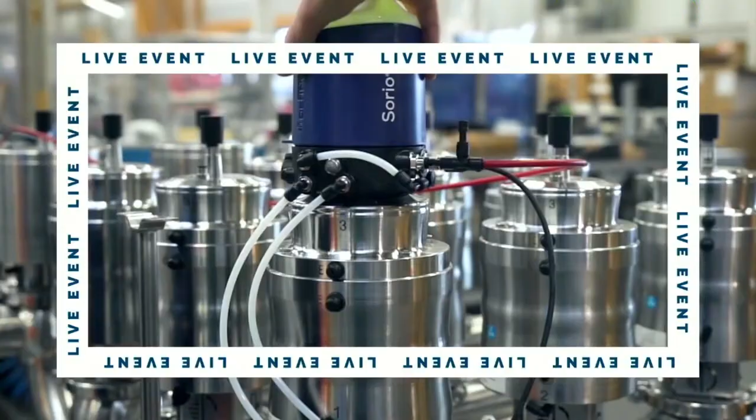First off, let's welcome the Managing Director of Definox, Magali Chouinteriau. Hello, Magali. Good morning, Jean. Good morning. How are you? Fine. Quite nervous, but fine. Magali, tell me, what's happened at Definox all this year? All this year, that represents many days for action. Take your time. We can go.

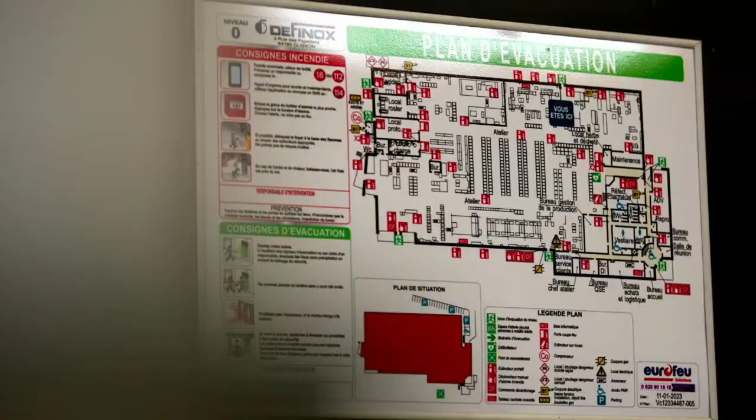So, new people, new product, new customer, new business, less carbon emission, and the most important, less injuries. This year, you've decided to focus this event on safety. Could you tell us why? You know, as we can see on the screen, at Definox, safety is a basic, as in many organizations, of course. And we spend a lot of time, a lot of energy, money, trying to change our mindset, our behavior, and we know that it's a daily challenge. And we consider it's the same for all organizations and it could be your challenge too. That's why we decided to focus on it.

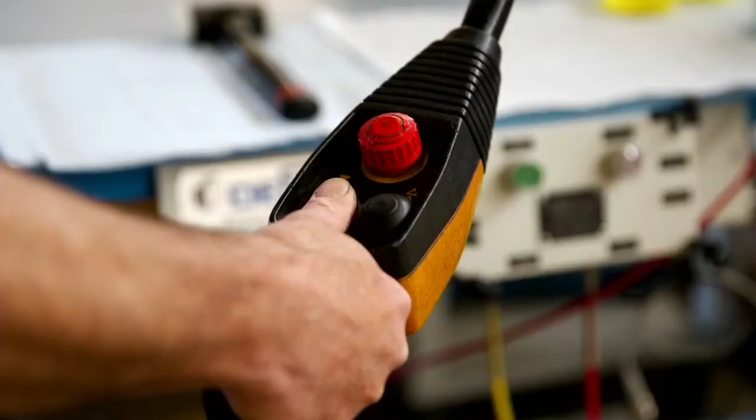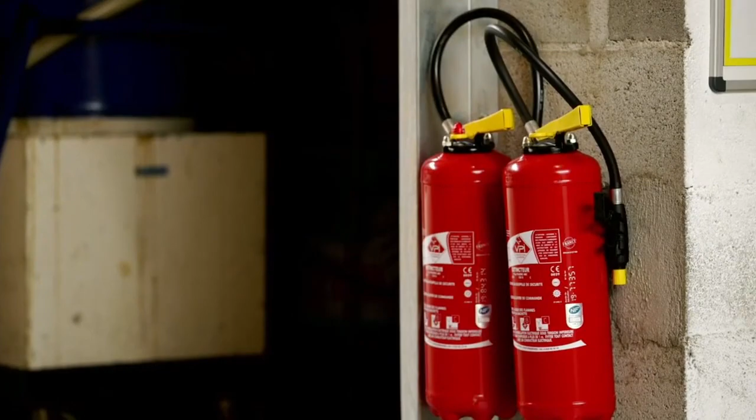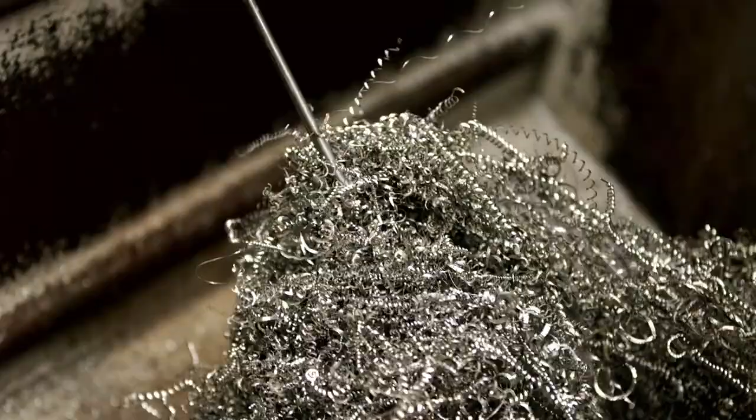Safety is a vast subject. Who does it concern? People who are moving, who are acting, interacting, who are working. But it's not only a concern of people, it could be a question of product too, how we can protect the product. So that can concern many, many people. Everyone. Safety and economic performance. How can you join the two? How can safety boost your performance? That's a good question. Thank you.

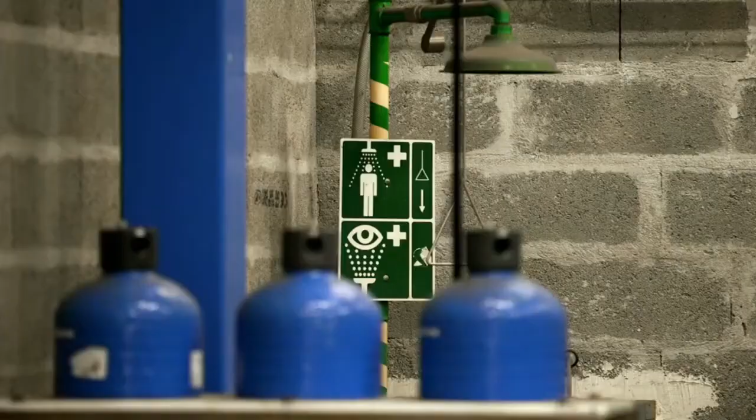Yeah, safety could be an issue, a problem, a question that needs to be faced after injuries. We are quite afraid and we need to react. It could be more a negative reaction, or it could be an opportunity to change, to improve the situation and to perform. That's where we want to be today. To act before, with more proactive action. Okay, have you got any example? Yeah, it could be just today. We would like to humbly share experience for maintenance people with quick wins, with tools, with behavior, or to share expertise to show what could be the right equipment for the right product and the right process.

Great. Magali, let's start with the first part of the show, and we'll meet at the end of it. The first part of the show, the safety provided by Definox. Welcome, Nicolas. Hello, Jean-Hugues. It's a pleasure to see you again. Nice to see you again too. Hello, everybody. I can see new faces.

So tell me, Nicolas, how does Definox respond to their customers' safety concerns? Yes, so Definox provides valves and solutions in sanitary processes, so it's mainly hygienic or aseptic valves. So I would say that for us, providing safety to our customers' solutions or to operators is an everyday challenge. It can go from finding the good or the perfect sealing technology in respect of the product. It can go also from answering a local regulation regarding a food contact product, or avoiding any risk of contamination, or just providing the customer full safety during a maintenance operation.

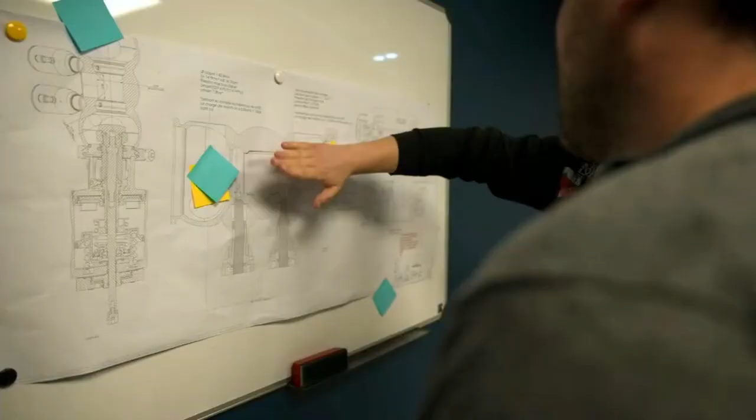Well, issues of safety and certification come into play from the very beginning, from the beginning of the valve design. Let's meet Maxime Parot, product engineer. He will explain to us how. At the beginning of the process, we have to check the different possible inputs. It could be from a customer or from our sales team. They detect some new opportunity, some new market. And it could be based on our different applications, as we detect new opportunities based on technical references.

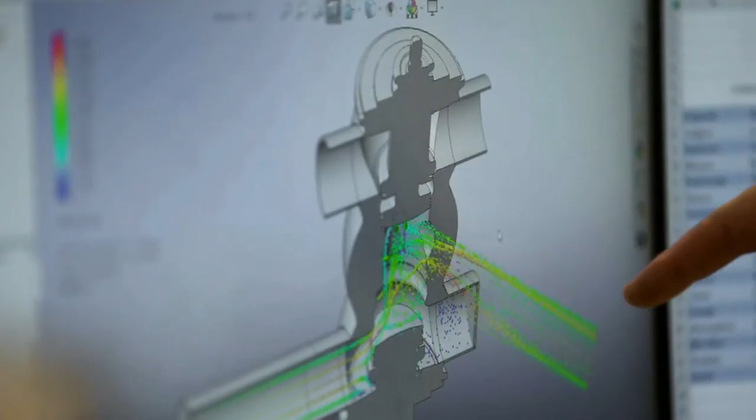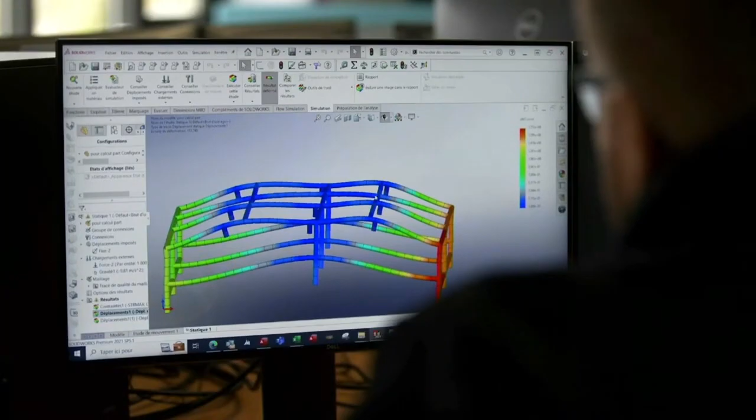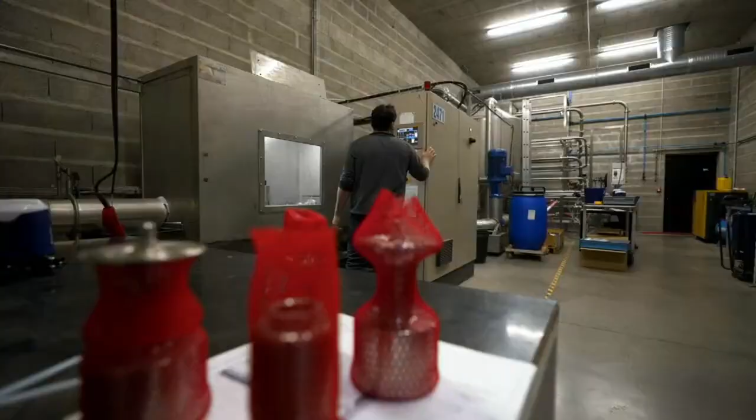After, we summarize all that information just to have a quick view of what could be possible. We start to discuss with the different contacts, the customer again, or internally with our design team. We start to draft some hypotheses. In the technical information, every time we have all the hygienic information, because it depends on the application, but we have to respect rules of 3A, for example, or EHEDG. So that's why we want to create something cleanable and be able to have a certificate for food application.

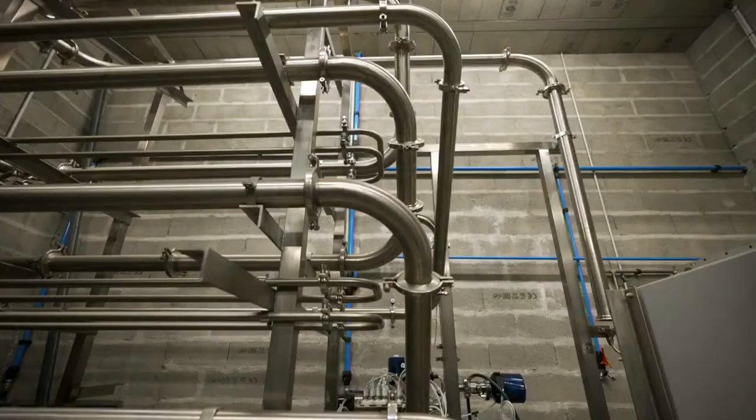We are manufacturing the first prototype and the interest is to check the feasibility. So we check if we have some issue, if, for example, we will have to modify some part on the valve. But we are able to have a double check with some external certification team. If, for example, something is important to modify, we are able to do it very quickly.

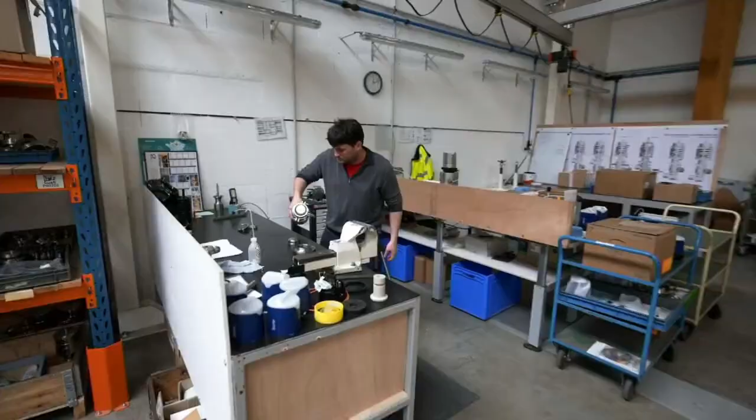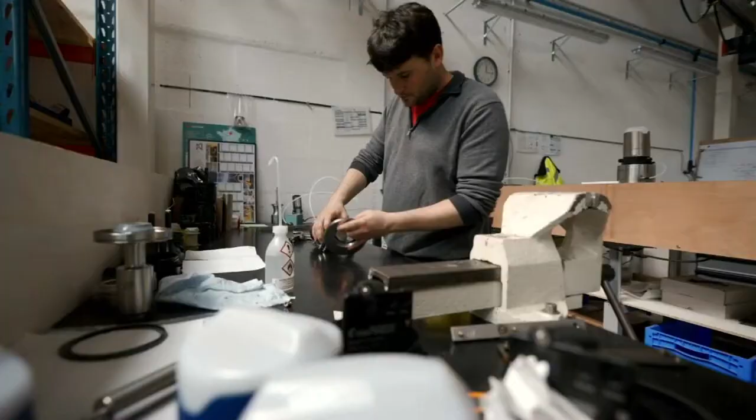When we are working on a new application, we check which seal is linked to the process and for which application. After, we will create the stainless steel around this seal. At this step, we are able to say, okay, we have the right answer, we are able to start the certification and at the same time start the industrialization. For Definox, it's very important to create more than a valve, create an answer to a need for the customer.

Welcome on stage, Vincent. How are you? Thank you. I'm doing good.

We've heard that for Definox, it's important to create more than a valve. What do you think about that? Yeah, it's very important to create more than a valve. That's also why we did create our pack service. Exactly. Tell me more about your pack service. Yeah, so the pack service is the way we call the support to our customer. It focuses on three main axes, which are the maintenance, the training, but also the spare part supply.

So our team of the pack service is composed of back office people, in-house technicians, but also field service technicians. We do also have trainers. Regarding the maintenance, we are able to carry out preventive and curative maintenance operations for our customer. We can also do predictive maintenance thanks to the new Sorio control top.

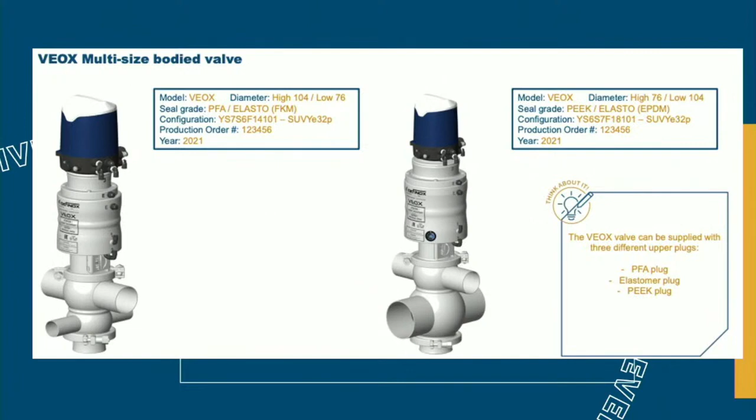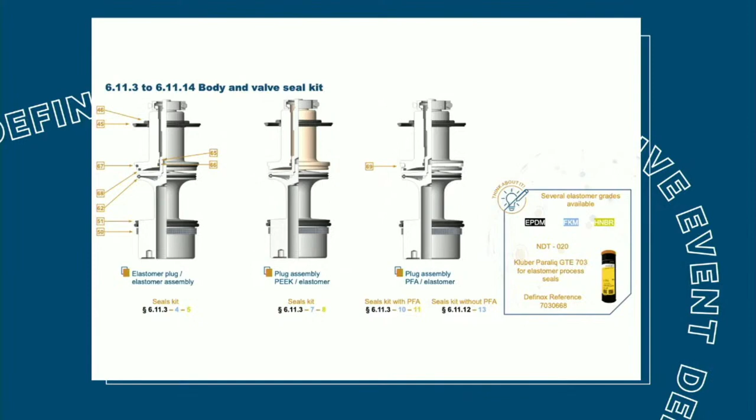We also can count on our network of over 70 companies to be able to support us locally for that type of mission. We have also invested money in a video room to be able to do remote training, but also to solve some technical issues, like trying to be live facing our customer.

And for the spare part supply, we stock approximately 8,000 components with an on-time delivery goal of 98%. And here again, we can count on our partners to be able to supply spare parts in a fast way to our customer. About that, what would service be without the right tool?

Yeah, so security and safety is of course a big concern. So that's why at Definox we have dedicated toolkits, securing toolboxes, also a hydraulic press that is CE certified, for example, to carry out the service operation on our actuators.

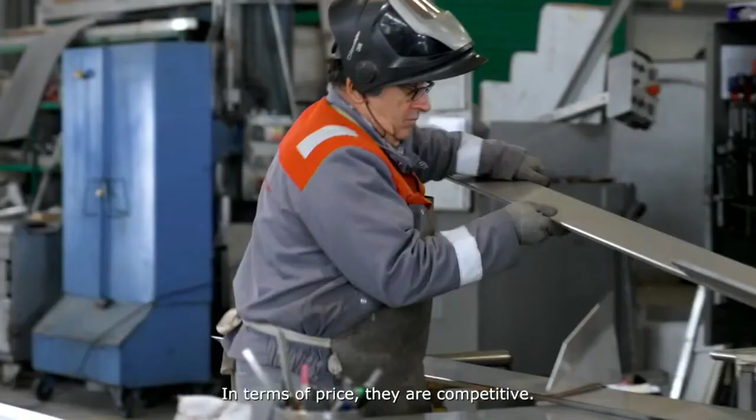Welcome on stage, Julien. Hello everybody. El profesor. Exactly, I'm trying to explain our valve, how it's working, what we could do with it, and give some easy understanding. It's not cold in the workshop? No, that's okay, right now it's almost summer for French people, so it's very nice weather. It's a very sunny day. We cannot see it, but it's a sunny day.

Julien, about this valve, what is specific about this valve? Yeah, we've seen two footage with Laita and Chalvignac. They gave us some nice explanation about this valve, how it works. But my proposal is to do it in the lab. I will show you exactly what is inside, how we could dismantle it, what is the feature, and so on. But for this, I need to place my white jacket and go in the lab. Okay, take your white coat and go. We'll meet at the lab.

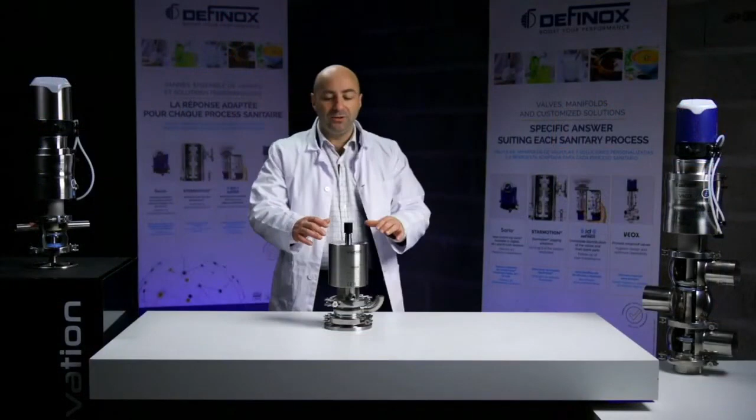Here we are in the lab with DCX3 Clean Flush. This equipment is very important for any tank you could find into your plant. This valve is very interesting because the way to install it is totally flush. You see, it's flat on the table. It means we do not have any surface going into the tank, so it will increase the hygienic purpose of this equipment, and it will also offer a better cleanability of your equipment at the end.

We will go step by step and describe what we have here. We could see we have the actuator. This actuator is spring loaded, so it means we will drive it by air, and the normally closed or normally open position will be defined by the spring. We could also provide a double effect type. It's useful because if you want to drive each valve one by one, if you install several valves like this on the same tank, you could do some sequence. For example, you will start to clean the upper level and go down after each step. It could also be in one shot.

Here we have a lantern, and we could see we have a port here due to aseptic circulation, and I will explain why in a few minutes. The body here is an L type, but we could also provide a T body type. The T body type will be useful in the case you want to use the same valve to inject the cleaning agent and also drain as a drain point, or if you multiply the quantity of valves for the same tank.

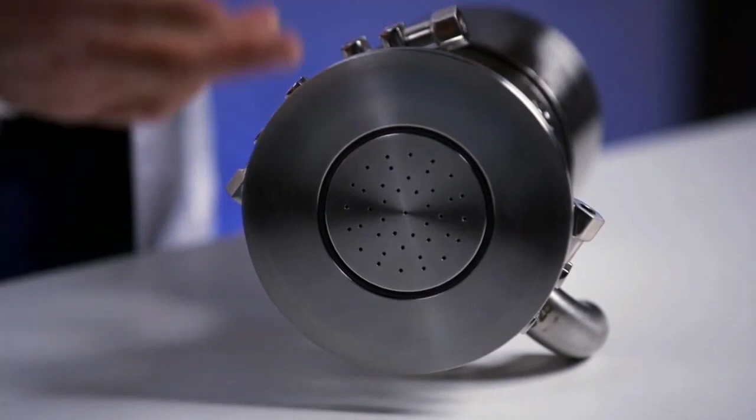To design this spraying plate, it's quite easy. You have almost nothing to do. Just share your 2D models or 3D drawing of the vessel plus the agitator, and based on this we will do some simulation and we will define what will be the most useful pattern for your case. So now we will open the valve together and see what we have inside. It will help us to understand the key features offered by this component.

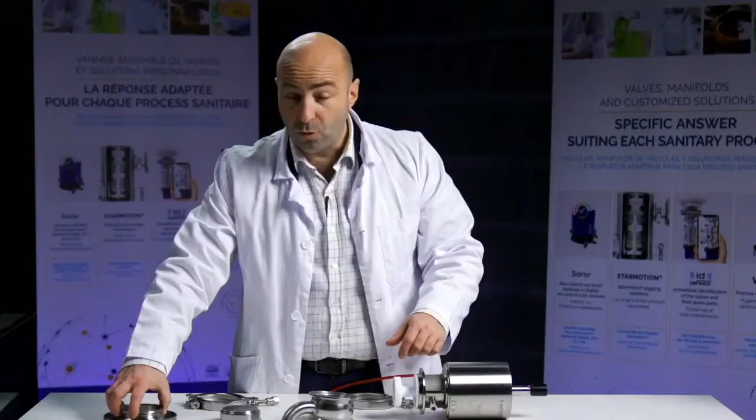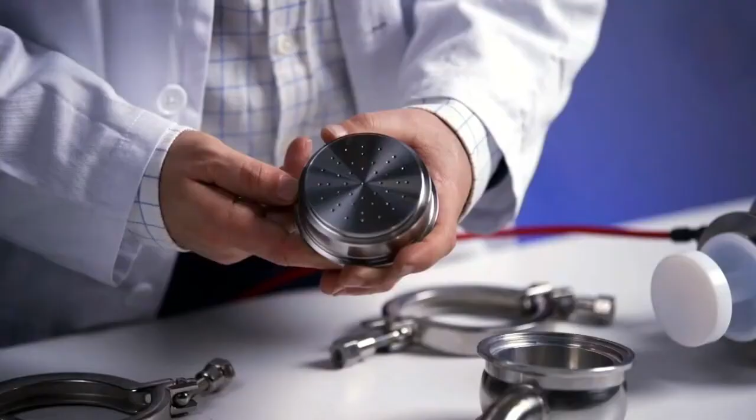The valve is composed of 1, 2, 3, 4 components. We have here the flange. This flange will be welded on the tank. The spraying plate with a hole pattern. The hole pattern will cover max 70 degrees angle, and the quantity of holes will depend on the design of the tank and the design of the agitator we want to clean.

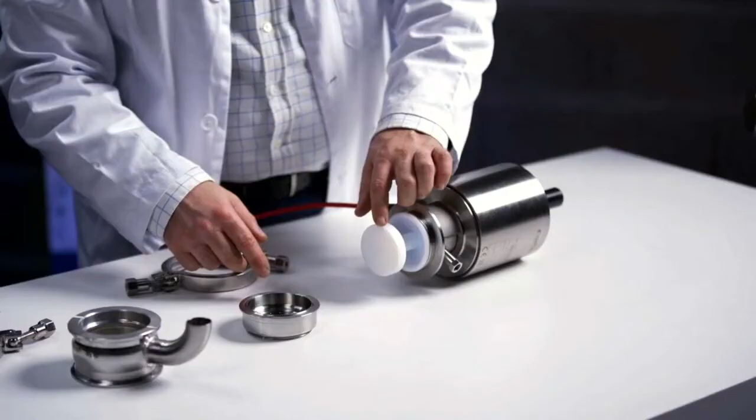The body, this one, it's L body DN25, and we have also the body DN25 but with a T, so a second port is placed on the side to have a drain point or to connect several valves in series. This plug is made in PFA, so it's quite interesting because we can see here we do not have any additional gasket to ensure the sealing between the spraying plate and the plug. We have a small bump, and this bump will be in contact with a flat surface inside the spraying plate, and it will ensure a perfect sealing system with this part.

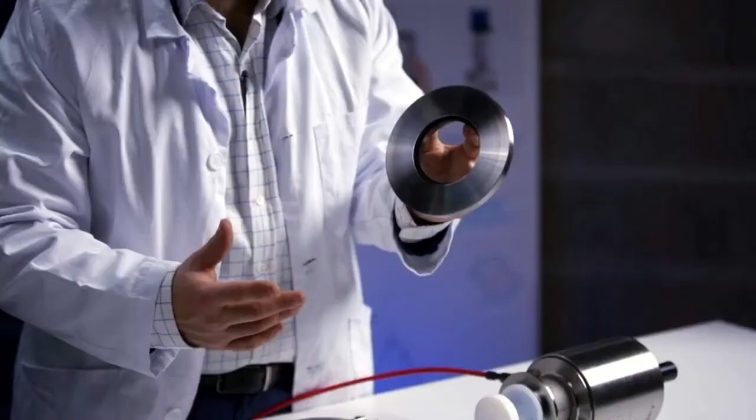As we can see, this valve doesn't have so many gaskets inside. We have one gasket in the body, one gasket in the flange welded into the tank. Also, we are saving on the number of seals used for this valve, because this valve doesn't require to be tilted, so we will not have any protrusion into the tank volume, and we do not need any gasket to ensure a perfect movement while also ensuring the sealing of the body with the flange.

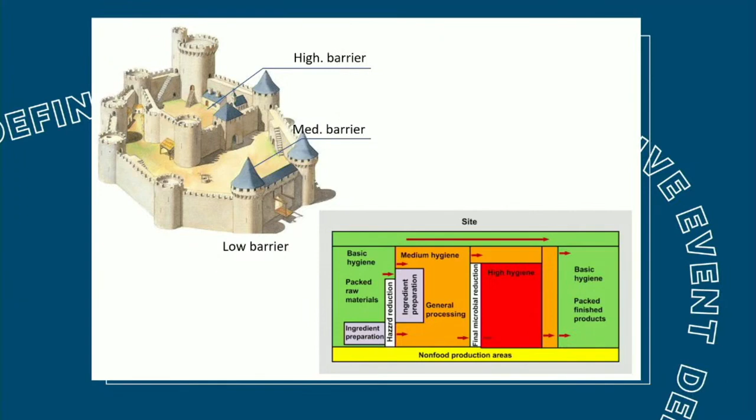And in fact, what you see on the screen, a plant following 3A, EHEDG or GMP manufacturing rules is built like a fortress or a castle, and we will make it difficult for contamination to go into the core of the process. Like this, we can ensure that the highest quality will be ensured at every time and every day. And to do this, we are using different process valves to have different step-by-step functions.

Okay, that's an interesting comparison. So can you explain to us which type of valve can be used? We have different types of valve, and the most common, the easiest to find, is what we call a rotating valve. It could be a ball valve. And another type of rotating design is a butterfly valve. It's mainly the most used because a butterfly valve offers better cleanability and opens and closes faster than a ball valve. So ball valves will be used mainly for feeding lines, and process lines will be equipped with butterfly valves.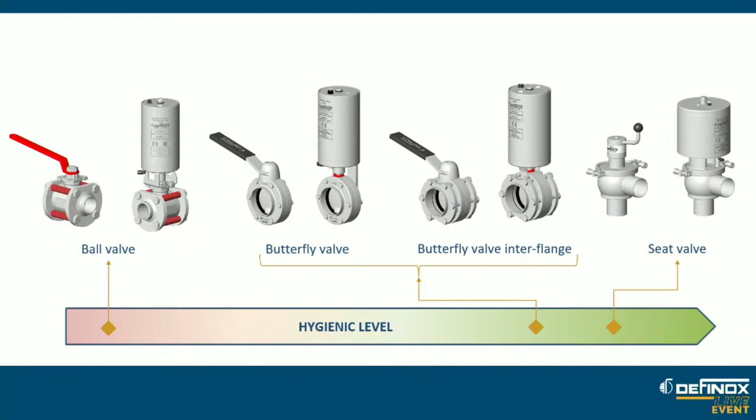However, when we are thinking about going above for the hygienic step, seat valve technology is much better, and the seat valve has a totally different design from a rotating valve. We will have something sliding up and down, and it will close the process chamber. It's really useful because with one seat valve, we could, for example, replace two butterfly valves.

Another function we appreciate in the hygienic process is that the seat valve offers better cleanability, better flow management, and we can add some extra features on it. And these extra features offer, for example, an aseptic version for a process. So it seems to be kind of logical. You select each valve according to the process requirements. Exactly. And can you explain more maybe about the aseptic valve?

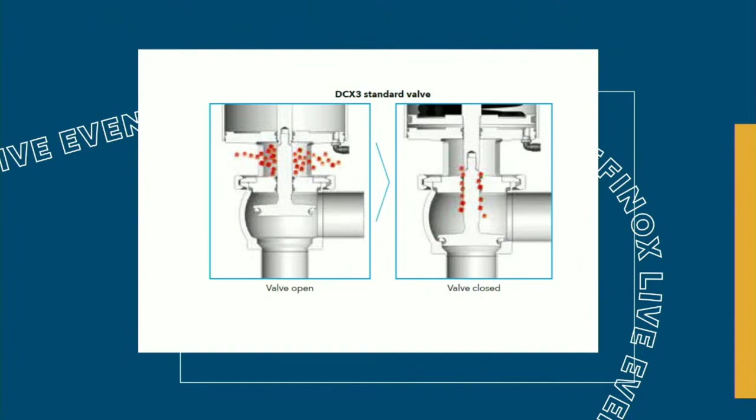Yes, for sure. When we are doing a process and the hygienic concern is very high, in fact, we are concerned by two points. Avoid any external contamination. This is what you are seeing right now on the screen. When the plug goes up and down, one part will go into the environment and some micro-contamination could go into the process chamber. And this should not happen because it could be an issue for the quality and for microbial contamination.

So what we are suggesting as one solution is to place a sterilization chamber around the shaft, and like this, every time the shaft goes up and down, we will ensure that everything is sterilized.

This function is very useful, and it's not the only challenge we have, because avoiding external contamination is a key point, but we also need to avoid cross-contamination coming from the process line itself. So we can combine the aseptic function with the mix-proof function. It's an important point to avoid both sides of the problem. Great. Julien, what about going back to the workshop to show how an aseptic mix-proof valve works? Absolutely. Yeah, I will go back. Okay, let's go.

Here we are with an aseptic barrier valve. This valve is a crucial equipment for your process, especially in the food industry, but not only. This valve with EHEDG certification is very useful to keep the highest safety level for your production. This valve with the steam barrier offers a strong and reliable isolation from external contamination.

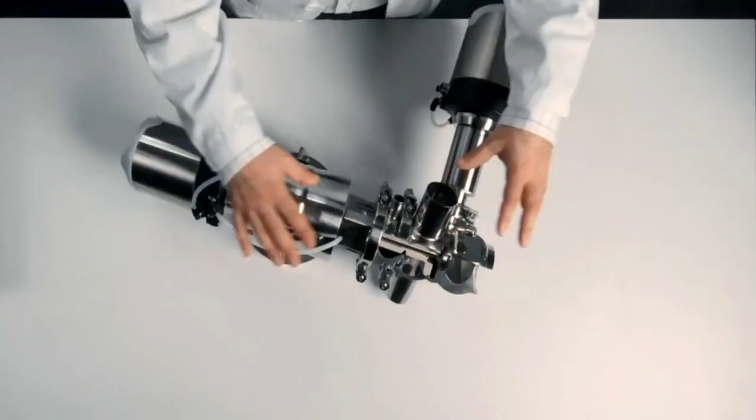So each part in contact or in potential contact with the external environment will be sterilized with the steam. The steam will be applied roughly between 110 degrees and could go up to 150 degrees for a flash process. So flash meaning 30 minutes. What is interesting in this valve is the general layout, for sure. What we could mention is only 2 actuators to drive the whole process.

2 actuators means one dedicated for the main plugs, so we'll be able to do upper and lower lift, one control top here, and a side valve dedicated to leakage and drain of the steam with its control top. When we have a look together inside, what we could see is a gray or white part. This part is the upper plug. The upper plug is made in one piece in PEEK, P-E-E-K.

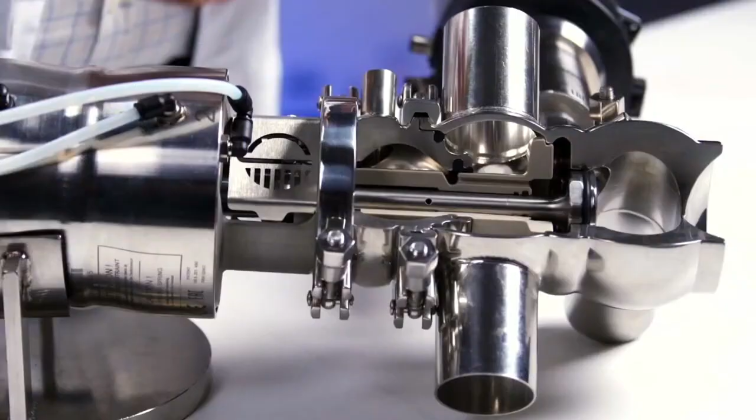This material is very interesting because it offers similar resistance to stainless steel, but also the behavior is an advantage for this valve because it means we don't need to use an additional seal to ensure the sealing of the valve. Less sealing, less time for maintenance and less maintenance overall. Also, what we could see, you do not have any diaphragm for this aseptic valve, so it means a longer running time and less maintenance needs.

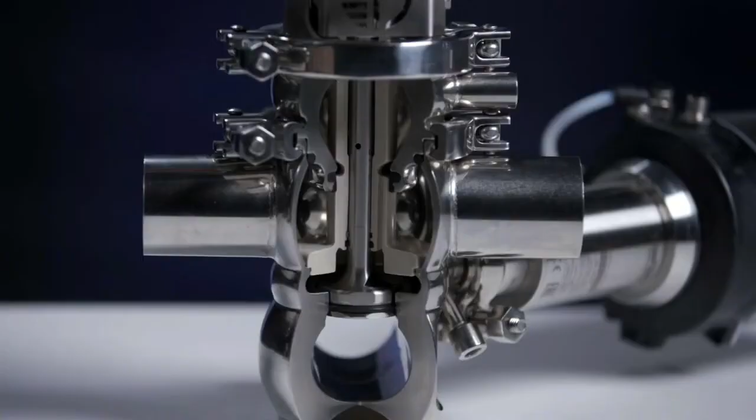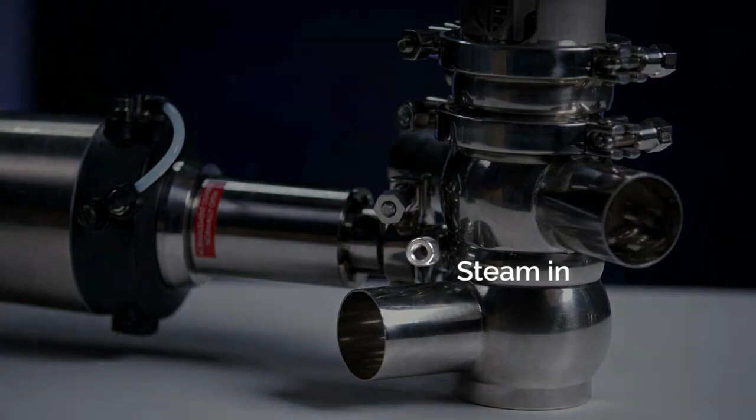The chamber here is used to inject the steam, and the plug, when it travels through this chamber, will always be sterilized, and so we will not have any external contamination from the environment. We have on the side another valve. This valve will be used to also inject steam and exhaust condensate. We have the intermediate chamber with the lower plug. We could do some lift also on this plug.

What is also interesting to mention is the main connection port for the steam is placed here, so you do not have to multiply the connections and the piping around to get the steam in the valve. Everything is focused in one point, so it's faster and easier to install for your process line also. When we are speaking about fitting and installation, it's interesting to mention the size and how it's available.

It's from DN 1 inch to DN 3 inch. And we do not need any eccentric reduction piping to connect with that. So it means the DN 1 inch will be directly the right size on the piping, and DN 3 inch also. So it's easier to install and higher hygienic perspective, because everything is matching the right diameter. With all these advantages, we fully understand why this valve is the best solution for the food industry, and not only.

We are still live on stage. Now it's time to run the third and last Defi quiz session with Nicolas. First of all, let's display the QR code and the PIN code. 3195497 for those who are not connected yet, but I guess everyone has been connected for the last Defi quiz session. Don't forget, after this session, we've got the results and the three best players. Nicolas? Yes. Are you ready? I'm ready. Let's go. I hope you are too. Yeah.

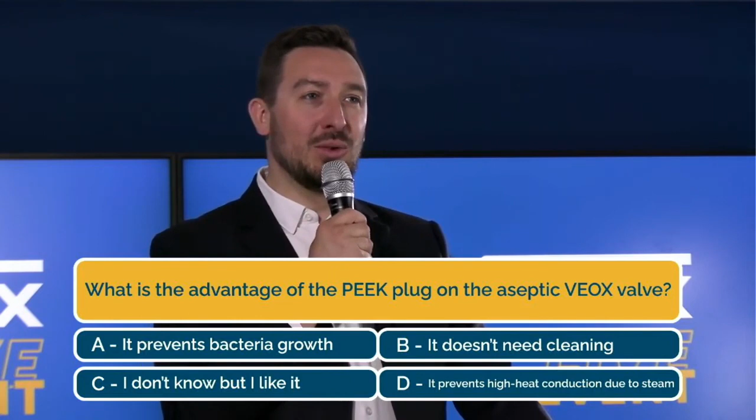Answer D, it prevents high heat conduction due to the steam. I would select the C. I like it. Let's go for the answer. It's the answer D. It prevents high heat conduction due to the steam.

Was it the last question? No, there is one more, to improve your score. One more question, and we can see the result afterwards.

How long do you think it takes to service a Veox aseptic valve? Single choice possible. A, approximately 40 minutes. B, more than 1 hour. C, 2 full days, quite long. And D, I'd rather buy a new valve. I don't maintain it, I cut and I buy a new one. It's easier. Yeah. We like this kind of customer.

The answer is A, approximately 40 minutes.

This was the last question of the Definox quiz session. All the players have done their scores, and we'll be able to see the three best players. We can show them. François is the third. Dan is the second. And the winner is, ladies and gentlemen, Expect. I guess it's a nickname. Congratulations to Expect, 8 answers of 9 with a score of 7,793.